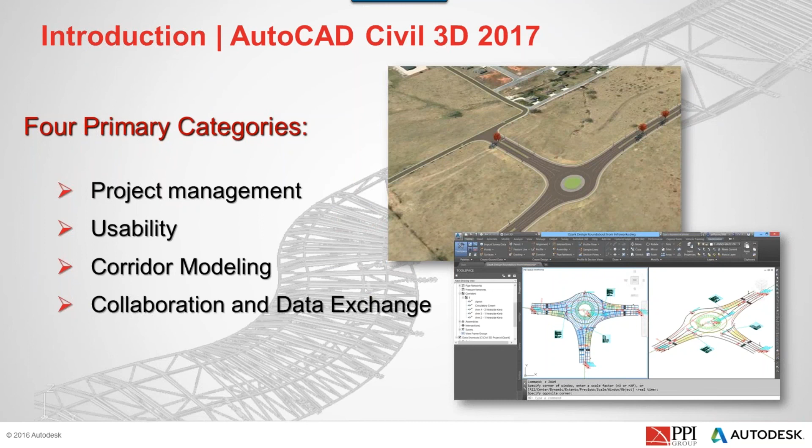Starting with project management, we'll be breaking down these 5 individual categories: reference styles utility, cache data reference surfaces, corridor data shortcuts, subfolders, and data referenced objects. That's a big one, very cool. And then also streamlined creation of data references.

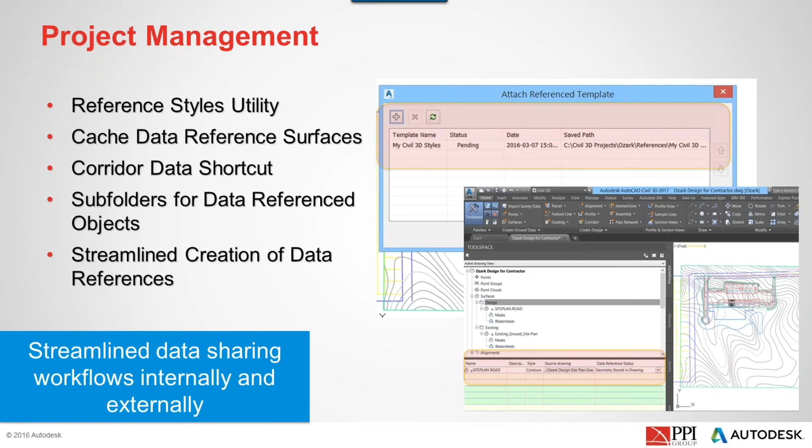All right, so let's break it down a bit. The first one here is the reference external styles. Peter Griffin thinks this is pretty cool, and I do too. What this basically boils down to is the ability to complete a drawing. What you're seeing in that top ribbon on the Manage tab, you'll notice over on the styles where that yellow arrow is, we have a new button called Reference.

As we all know, it's hard enough to get these project plans out. Often what we'll do is start a drawing using our in-house template, and then from there we need to convert it, whether going to an agency or another consultant or whatever it may be. So we end up having to go through this conversion process or importing data. What we're going to end up doing with this is a way where we can actually reference other templates while still staying in our current template, and we also have the ability to access other drawings with possible styles in it. So this is not only a great tool for the drafts folks, but also a great tool for CAD managers. There's a little bit of something for everybody in here, and we'll get to that in just a bit.

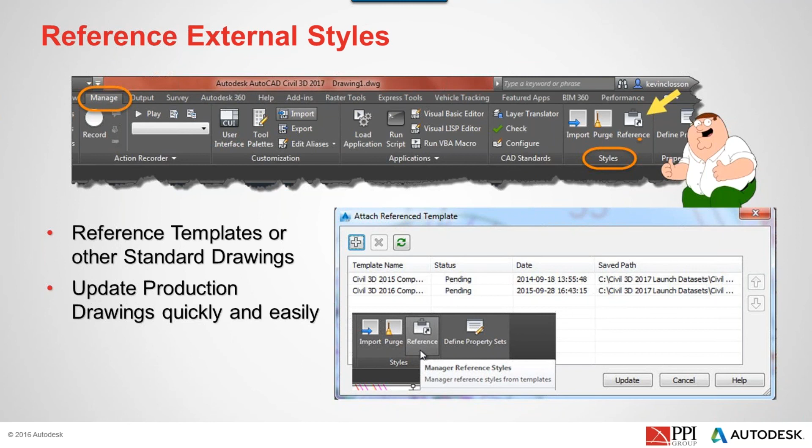Another new feature is the ability to cache surfaces, and what that's referencing is data shortcuts. As you know, a few versions back the data shortcuts were kept within your drawing when you go to send it to somebody, but the one piece that wasn't was the surfaces. So now you can actually cache it and send this out. The whole concept of this is to streamline collaboration with others, and it's a very simple process, just a couple quick settings. You send it out and you'll see that it'll come across.

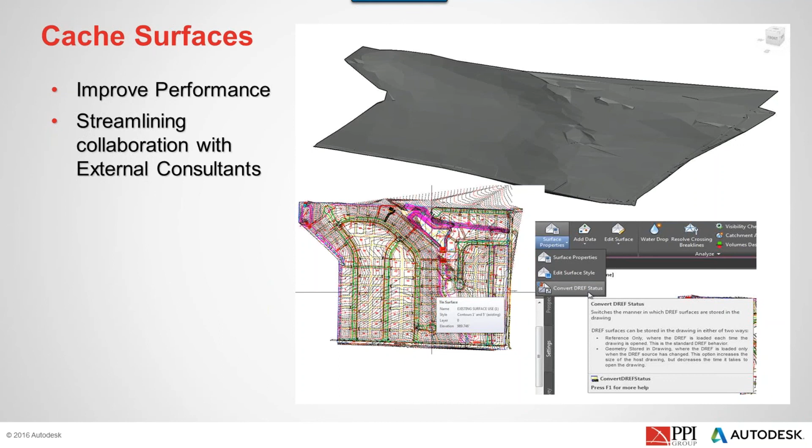Now this one was a big one: data shortcut folders. We now have the ability to create subfolders, and you'll see within these screenshots here, this is just in our data shortcuts. Notice it says surfaces. One of the problems has been, I don't know if it's really a problem, it's just been something we've had to work around or manage. When you would bring in data shortcuts, it would give you this great big long list of all of these surfaces, whether existing or phases or different designs, and we didn't have an ability really to organize those.

Well, now we can actually create folders, subfolders, directly in our prospector and again in the data shortcuts, and we can simply drag and drop those into their appropriate locations. So the end result is obviously better organization, but also we can kind of emulate corporate project structures.

Other little goodies here, same thing really on the other side. That's just talking about different alignments, whatever it may be. And of course, alignments can come in so many different forms.

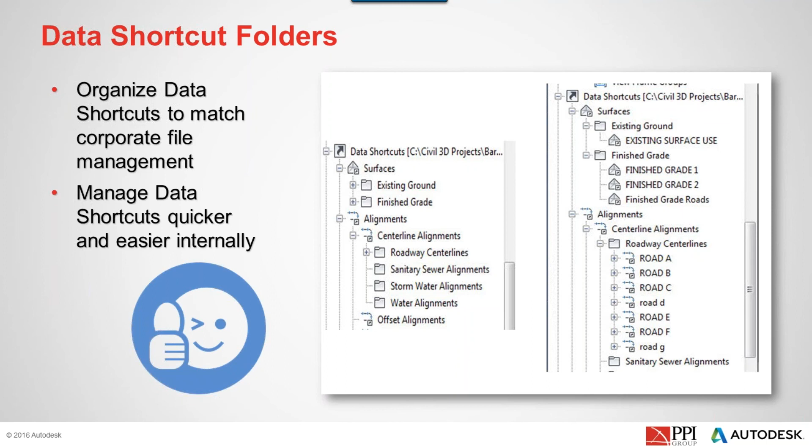So another way to simply organize these. I definitely give this one a thumbs up, you'll dig this. What else we got here? Like a movie review, yeah, oh yeah. This is big time.

And then what else we have here? Reference multiple data shortcuts. So the idea here is, if you can see that on the screen, we actually have the ability to pick several data shortcuts at any given time. You can right click or drag them directly into your drawing, and what it does is it'll do them all at one time. So I don't have to go in, grab each one, drag it across, check it, re-import things, whatever it may be. We can just use a simple shift button, highlight several, and drag it right in.

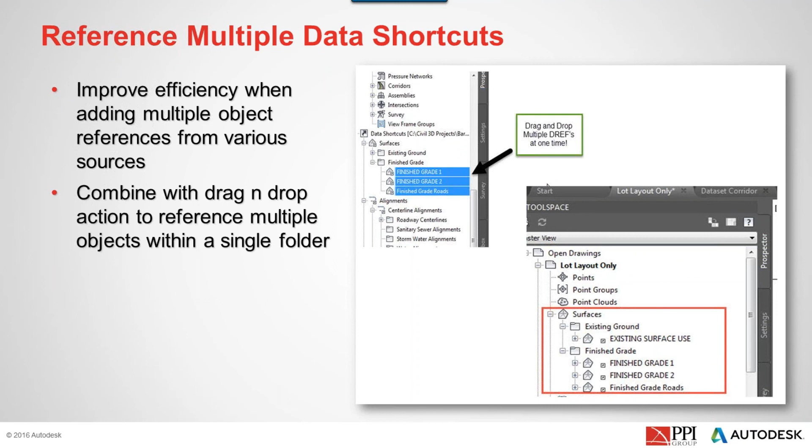Also, when it comes to alignments, profiles, all of that data comes in one shot as well. So you can kind of pick and choose. Well, maybe I should say that after the fact, you can always pick and choose. So very nice.

And then finally, dealing with these corridor shortcuts, this is big. This gives us the ability now to create corridors with feature lines.

Or sorry, I jumped ahead here, I tipped my cards to you. Actually, this allows us now to do the... I know, darn it. Well, I'm so excited to get to it, and it just dawned on me. I'm like, oh, dang it. Anyway, well, there you go. That'll keep some of you tuned in, maybe.

But anyway, corridor shortcuts. Traditionally, this was the one object that we couldn't kick out via data shortcuts. Now we can, it's just another option. You'll see, I'll point it out as we go. But again, it just gives us the ability to simply jump out and bring it right in, and you have complete control over it too once it's in your drawing.

Just like all data shortcuts, we can't change it, but as you can see on the slide, we can perform cut and fills and all kinds of stuff that we traditionally do with a corridor. But again, we just can't change it. So no more just pulling across surfaces and things like that, we can actually bring the meat of the drawing. Anyway, let's maybe take a look at these first before I get too far along, keep it as simple as possible.

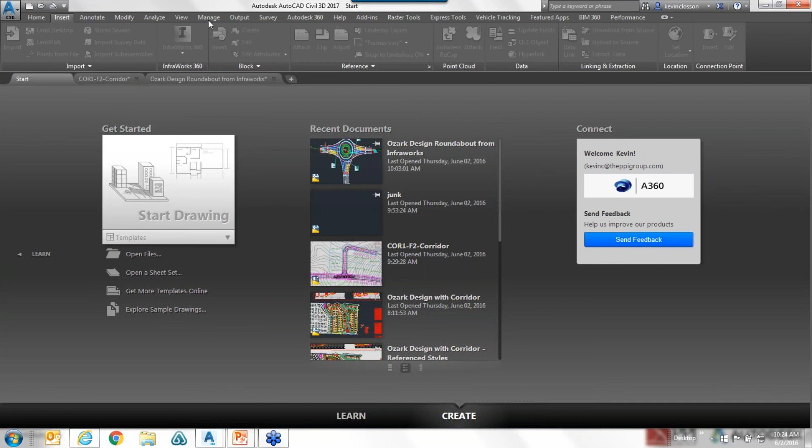Okay, so you'll notice this looks almost identical, and for the most part it is. However, let's start off with this reference external styles concept. And again, back in Chicago, this was the first thing that got the big oohs and ahs out of us nerds sitting there.

So if I were to go start a drawing, like we always do here, I'm going to browse out and grab one that I've already set up. And I renamed it, this is actually just Autodesk's template, but for simplicity, I named it Company Template. So if I grab that and say open, this is going to be, you know, many of you know this one, it's just got all the traditional Autodesk styles in it. Expand them out just so you can kind of see it here.

Check, and in particular, maybe I'll create an alignment. So here's alignment styles, and there you go, that's all the traditional ones. So what this tool does for us is I'll quickly create an alignment. And I'll leave it as the default name, alignment style proposed, sure. Label set, all labels, fair enough. I'll say OK.

And I'll draw something in here with curves maybe.

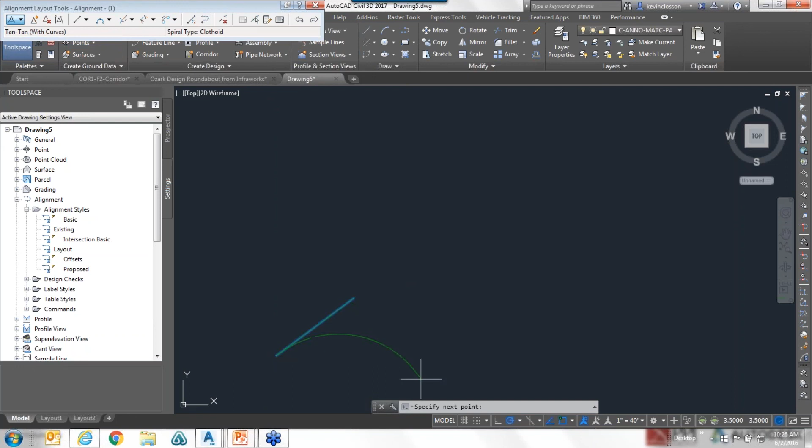Okay, if I zoom in, you can see that we have nothing too fancy, just a simple alignment, again using Autodesk styles. All right, so now this new tool allows me the ability to, on our Manage tab here...

There's a new button called Reference. If I select that, you'll see this form in the panorama pops up here. What I want to do is go grab this secondary template. Maybe this is something we're trying to deliver this in. You can do drawings or DWTs, and this one's called Project Template.

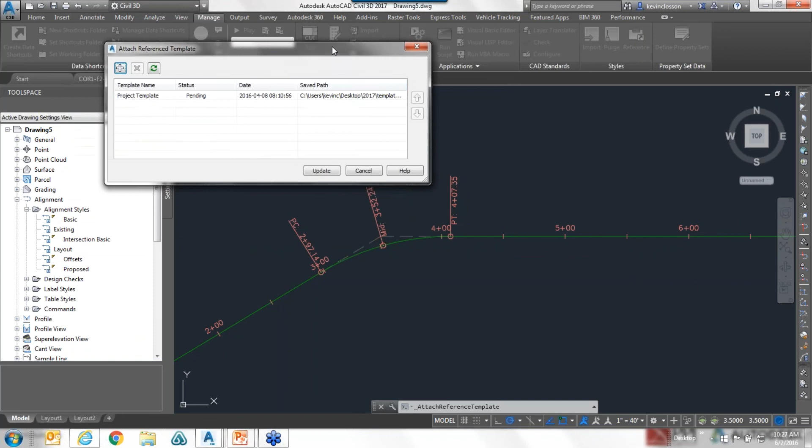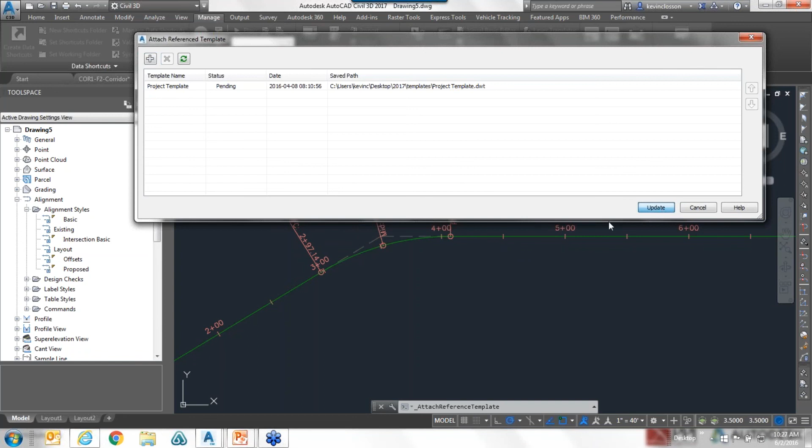Now before I go ahead and do it, when I grab that, you'll see down here that it lists that information. And currently, if I expand this out a bit, it's worth noting it says that it's pending. It's reading this, but it's not actually invoked yet. I created this and left the default name, but used the default style called proposed. If it was a different name as far as the alignment object style, you could switch it once this has been appended. But if not, I'll just go ahead and update this first. You'll notice, hopefully, how it changed.

The reason being is that other template, the pseudo deliverable template or whatever, has the same proposed alignment name. And these little icons, if I highlight that, they call that a paperclip, and that's just letting us know that you do have a different template or whatever's used there.

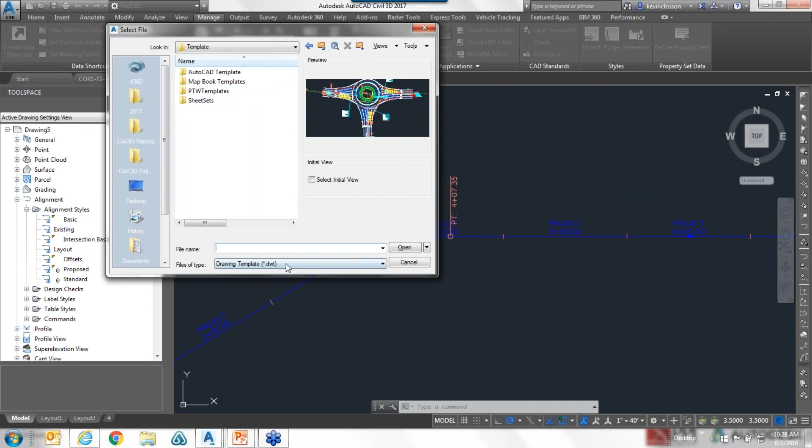Okay, now I could switch that back or get rid of that, or maybe I want to do something like this. If I were to go back in, I'm going to actually open up that original template, and I'll look in that same folder there. I'm going to grab the company template this time. You can see here it says company template DWT.

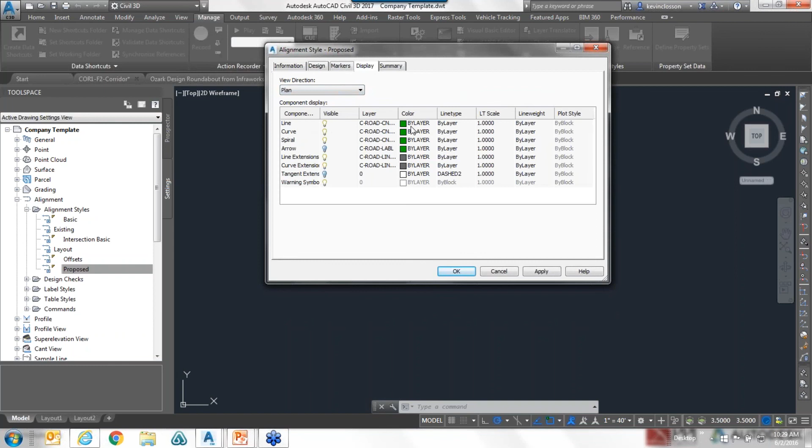If I go to that alignment and grab the proposed style that we've been playing with here, just for kicks, I'm going to change it—and I would never do it this way, but for speed—maybe I'll make them some form of yellow. Fair enough. And if I save that...

I'll jump back to my other drawing. And if I bring that template back in... my screen is flickering. Actually, I'm going to do it a little differently, I think. I'll just call it Company 2. Let's see what this ends up playing out here in just a second. There we are. Oh, where did I save it? Darn it.

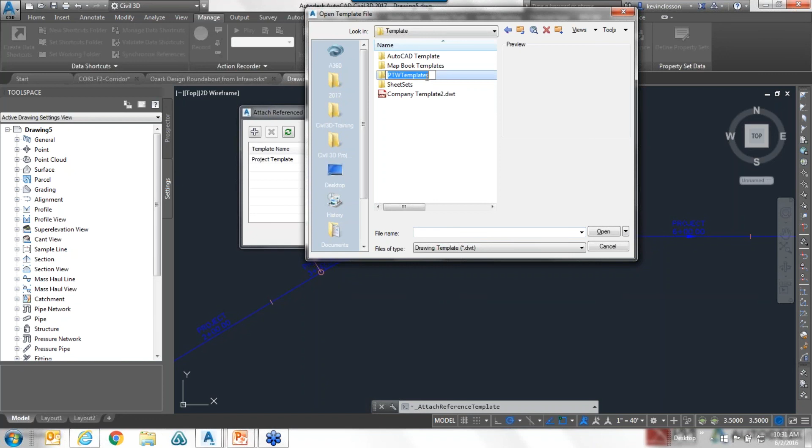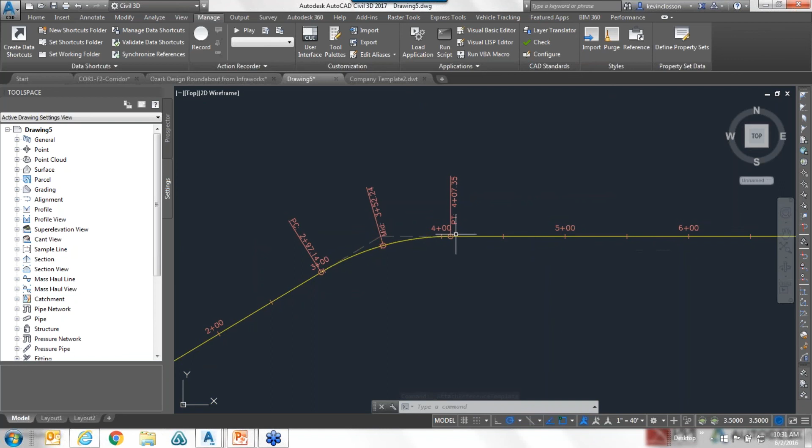All right, so here's the last little piece I wanted to show with this: again, I can load multiple templates, and I also have a hierarchy structure here. I'm going to update those first. Notice when I hit update, see how that went back to the original? Or at least to the one that I changed it to. If I go right back into that, I can grab whatever it may be, and just like other places of Civil 3D, we can jump around the hierarchy, update it, and it's going to go right back.

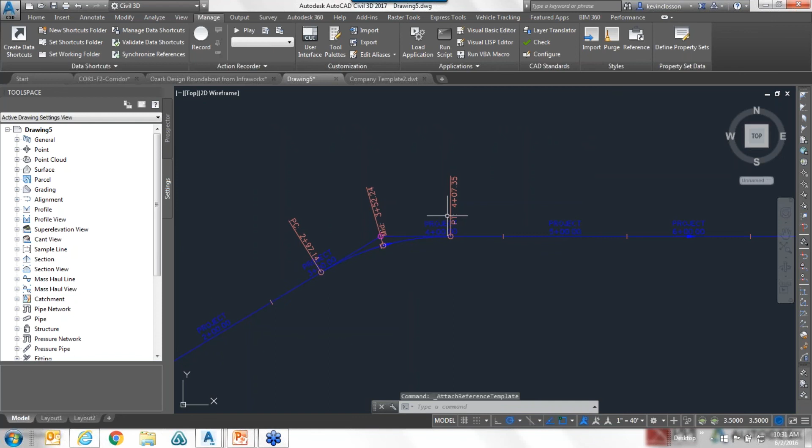Very cool. Okay, so that is referencing external styles. Again, we can leave it as it originally was as far as starting our drawing from our template, and then we can bring in other drawings and/or templates to finalize the design, just kind of cleaning up the whole process for us. Now, this one—very, very slick, not all that exciting, but very, very slick—is the caching surfaces.

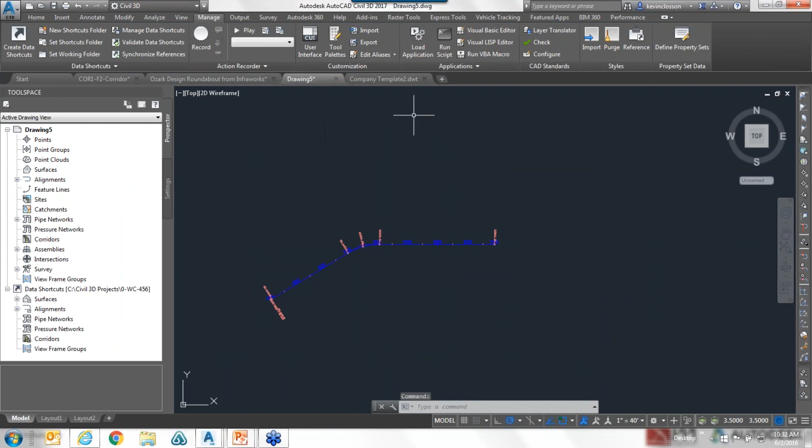All that ends up being: I started up a drawing here right before we were playing with this, and I have a surface. Maybe I'll leave this same drawing up and I'll save this on my desktop there. What I was going to do with this is maybe bring in a surface or whatever via data shortcuts. Any one of them will work.

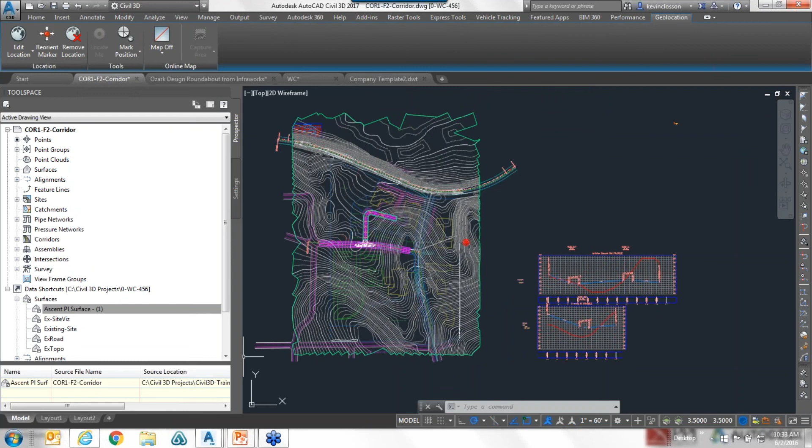Okay, all right, so now if I were to save this out—there's just a couple quick things to show with this. If I save this out, or I can do it from either drawing I guess, I didn't have to go through all that process. But again, if I save it and send it to somebody, the only thing that doesn't come across would be these surfaces. However, there is a new field, a new property field at the very bottom. Drag that across.

There it is. So by highlighting the header of surfaces, directly underneath you'll see there's my existing surface that I brought in. Here it is, data referenced status, and it says geometry stored in drawing. So if I save this out, that would end up being kicked out with it.

If I drop it down, you'll notice there's another setting in there. It just says geometry stored, or sorry, reference only. So that's one location for it, and there's a couple other spots.

To globally do this, if this is something you're always doing, sending these out, and you do want that surface to be cached and always sent with the drawing, you can go up into your settings tab under surfaces, and it's under commands, it's create, and of course they all look the same. Create surface reference, edit that, and...

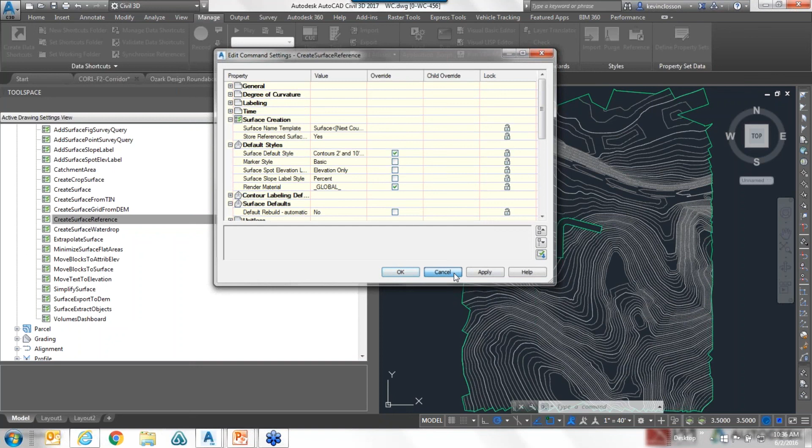Okay, moving on here, I've got a limited amount of time, but if I go back to this other drawing I'm playing with, when you have a large drawing or a large project and you see all these surfaces here, this is just up in the prospector, okay?

We now have the ability to simply right click on these, and I can create a folder. If we want to name this—say in this particular set there's several existing surfaces—I could call it EG for simplicity, and now you'll notice there's an EG folder.

I could create these, you know, possibly something like phase 1, phase 2, whatever. And then from there, these surfaces can simply be drag and drop for organizational purposes, and it still behaves just like they always have.

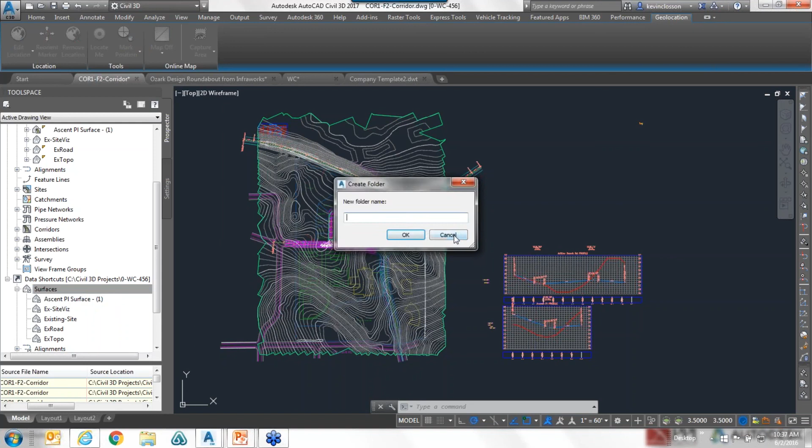Where this really is nice, though, is down in your data shortcuts. As I mentioned, data shortcuts have a tendency to expand quickly—from multiple sources you keep compiling data, and before you know it you have this huge list of surfaces, alignments, profiles, whatever it may be. So again, it's nice—you can simply right-click, create a folder, call it whatever you want, and organize it that way. That was a big deal to us.

And then from there, take it into whatever drawing it may be. From here, I can go to—and I mentioned this earlier, this is a big time saver—I can grab several entities at any given time, and either right-click and create the reference, or you can even drag and drop them right into your drawing. You can see where a couple different surfaces filled in, that kind of thing.

Also, with your alignments, profiles, whatever it may be, again we can grab several of these, right click and drag them right in. You can see where those filled in back there. So no more having to do it one at a time.

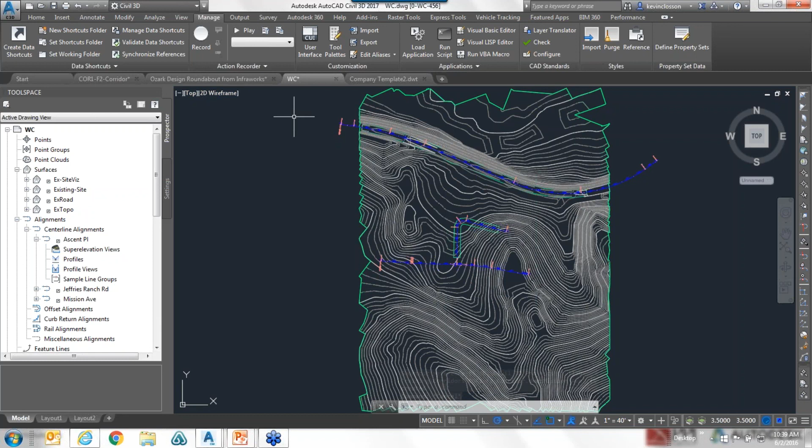So fair enough. And now maybe lastly on this—and again this was a big one for us—was the new ability to kick out a data shortcut of a corridor.

There's really not a heck of a lot to it, pretty straightforward stuff. You can do the old manage, create a data shortcut, and if I go all the way to the bottom, you'll notice one of our options now is corridors. If I wanted to, I could throw them all in the drawing at any given time, or all into that data structure or project. Now you'll notice the button expands out, perfect.

And if I were to jump over to a different drawing here, these corridors can be brought in the same way.

Right click, create reference. It'll take a second here and then it should compile. Very nice.

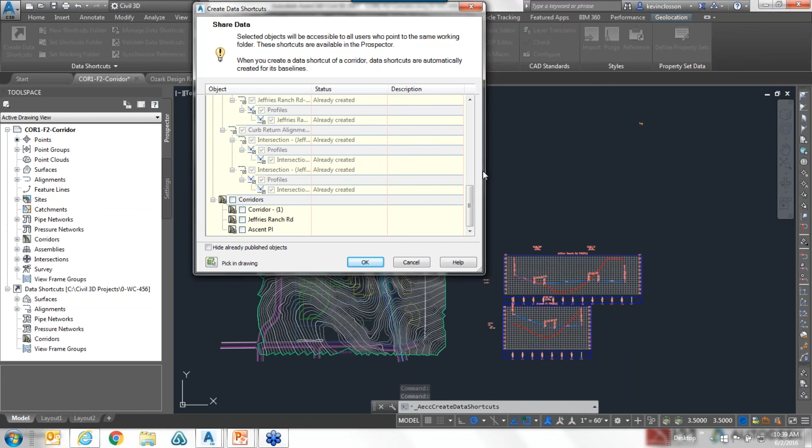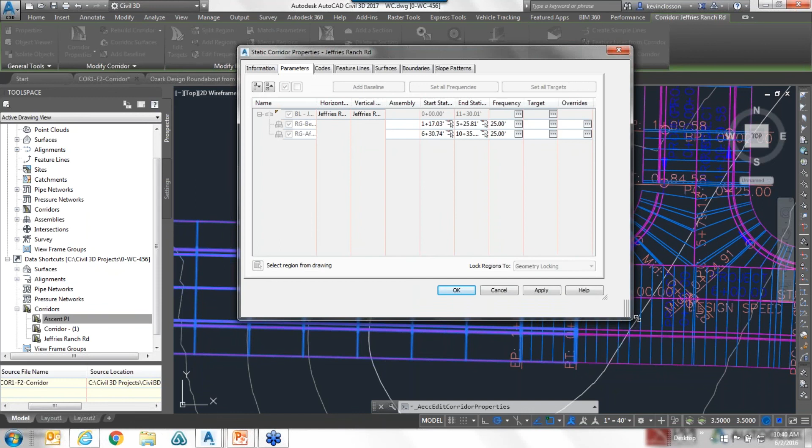Now maybe just to explore it real quick, if I pick any one of these corridors and go into corridor properties, there's not a lot we can do with it as far as actually changing the design. But we can do everything we've always done: create surfaces, create samples, get volumes, materials. You'll notice a lot of it's grayed out if you see my screen. We can build surfaces directly on the fly. Bottom line is we just can't change it, but everything else is still available—frequencies, targeting, all of that.

Okay, so I'm going to jump back over here to my PowerPoint for just a moment.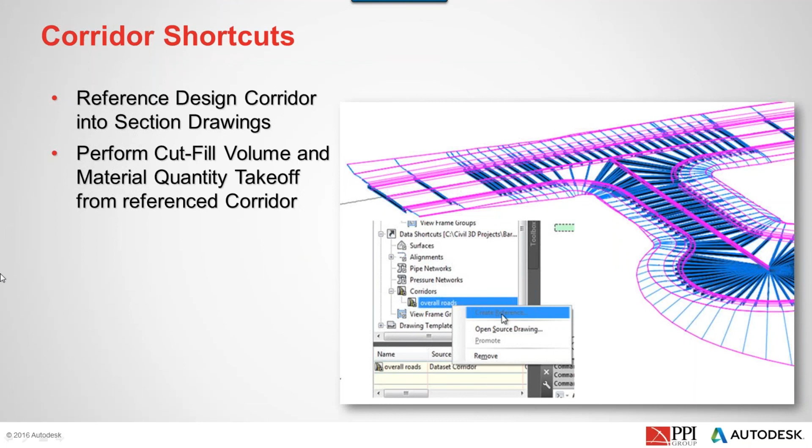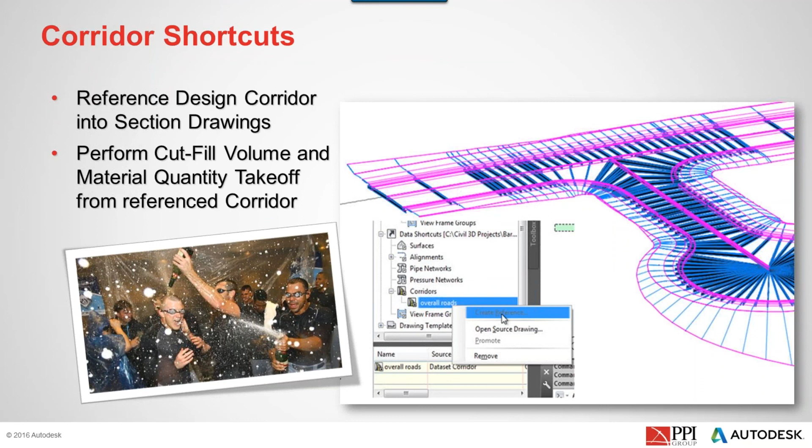So again, these corridor shortcuts, big deal. And in fact, that was us. That picture was us—I took the picture. That was in Chicago when we found out about this. I remember that, yeah, that was real champagne, real deal.

All right, moving along here, talking about usability. One's not that big of a deal, but it really became a nice feature. I believe it came out in Civil 3D 2016 in one of the extensions, or maybe the service pack. It's called the no site option for feature lines—though it could be a feature line or any type of object. For many of you that deal with feature lines, you know that if one entity crosses another and they're both on that same site, they'll interact with one another. Sometimes that's great, sometimes it's not so great. I'll show you in just a second.

And then maybe briefly, at least point you in the right direction, with the pressure pipe catalog—they finally added content for us, and that's a big deal. That's a huge deal. If I'm not mistaken, I think they have about six catalogs now. They've added everything from hydrants and additional valves, appurtenances, what have you. So that's a big deal.

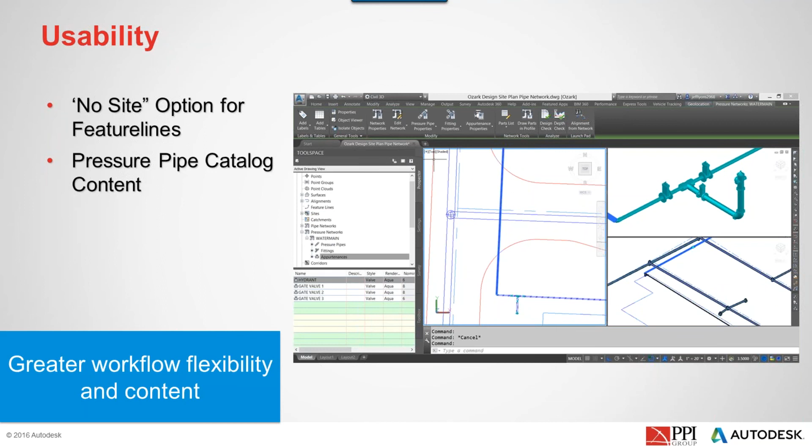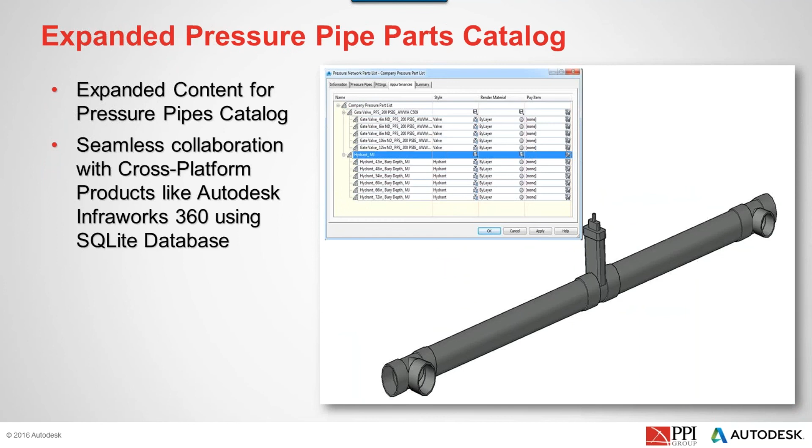So maybe just take a quick look back in our drawing—well actually, I'll save that and come back and do it all at once since we're kind of short on time here. You can see there, talking about the no site features and then the expanded pipe parts catalog. Very nice.

And jumping ahead here a little bit, talking corridor modeling. So with corridor modeling, here was the thing that I got all excited about: the feature line as a corridor baseline. I'll leave it at that for now.

But we also have corner cleanup—or actually I should say auto cleanup is what it should be. So if you have a tight bend, your design will automatically—the software knows now, and if you have a cross section or an assembly in there, it'll say, oh, this tight bend, or for that matter an angle, it'll resolve that for us. So instead of getting those bow ties, which we've had to fight for years, it now mathematically figures out a way to resolve that for us.

And then as far as extracting corridor features, we've always been able to do that, but now we have a workflow where we can grab all of them, or whatever it is that you want. Every now and then you need to get this out to a contractor or a surveyor that needs these elevated lines. Instead of going in and doing one at a time, I actually have a complete list that pops up and we can do them all.

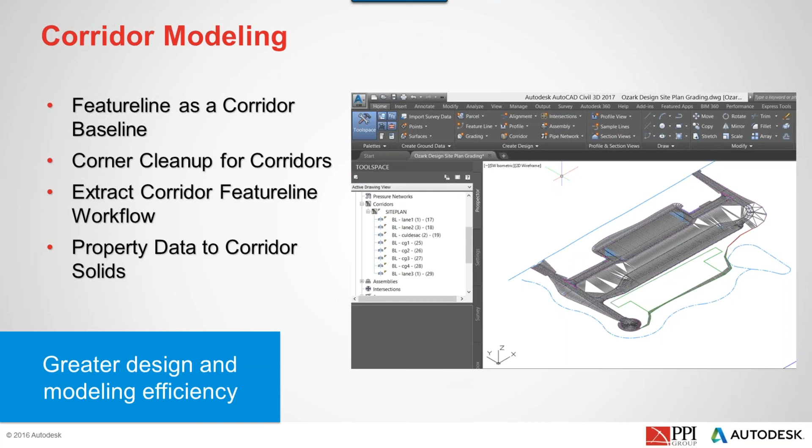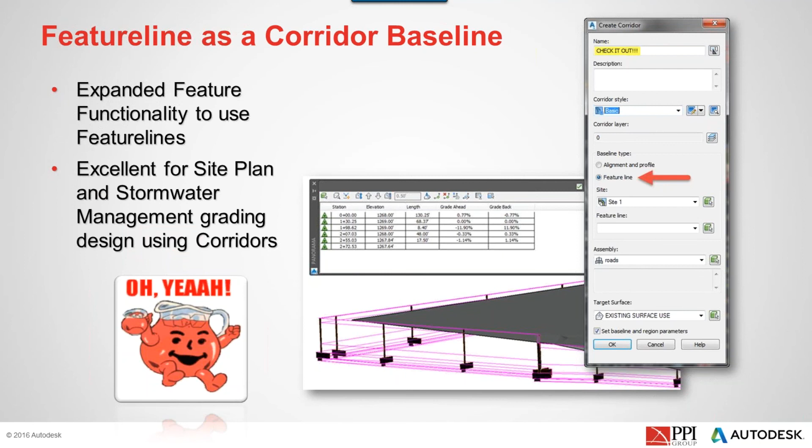And then there's just a quick dialog box. I'll show you, I'll bounce out and show it to you here in just a second. All right, so let's maybe take a quick look at that.

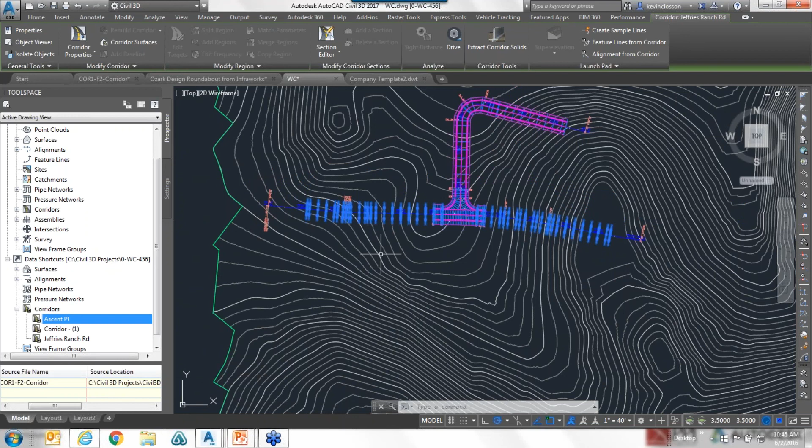So we will start with the usability aspect of this. With these feature lines, and you guys know this, it's nothing too exciting here, but I can draw in, say, a feature line in any old spot. I'll just say create a feature line from... I'll leave it on site 1. I'll leave the rest of the information here, and then I'll just drop it in.

Click, puts my old hash mark. I'll accept the surface's elevation, and then I'll move on to my next spot possibly. And again, I will accept the surface.

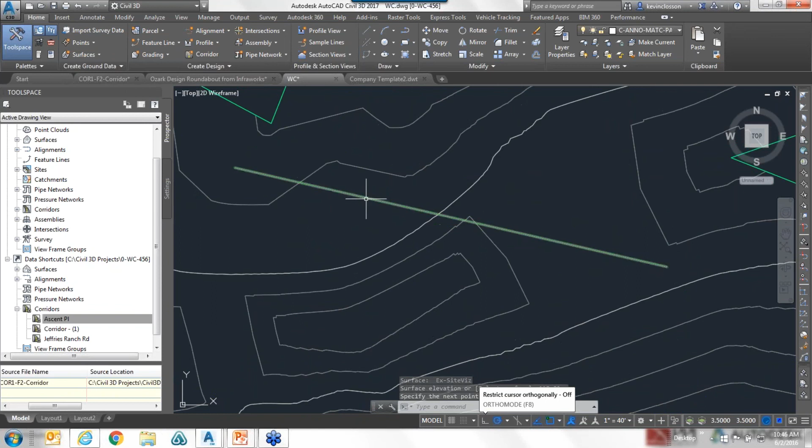All right, fair enough. So if I look at this thing, and we took a quick look at the editor on it, keeping it very, very simple, you can see we have a couple of different elevations. Now if I threw in, and I often will do this, where I'll throw in, say, a quick polygon or something like that. And if I return this into a feature line...

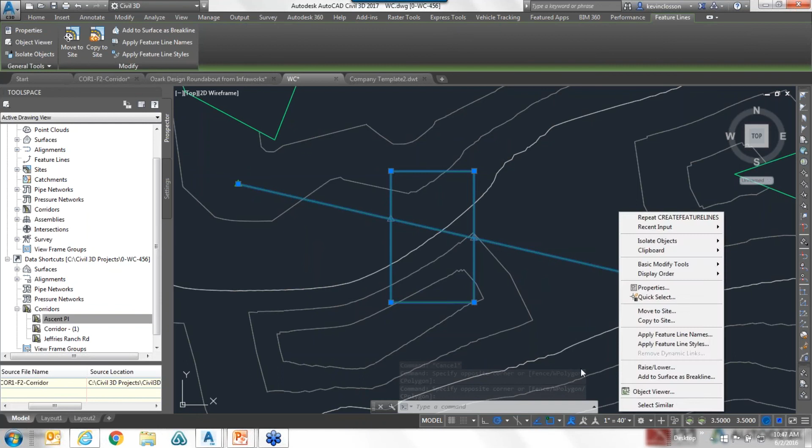I'll leave it on that same site. As I go down here, I'll assign some elevations to it. Maybe I'll make it 50 feet all the way around. Okay, if I grab both of these, and it looks pretty good to me at this stage of the game. If I grab both of these and took it into the object viewer, looks all right. But as soon as I drop that back, you'll see what that's doing.

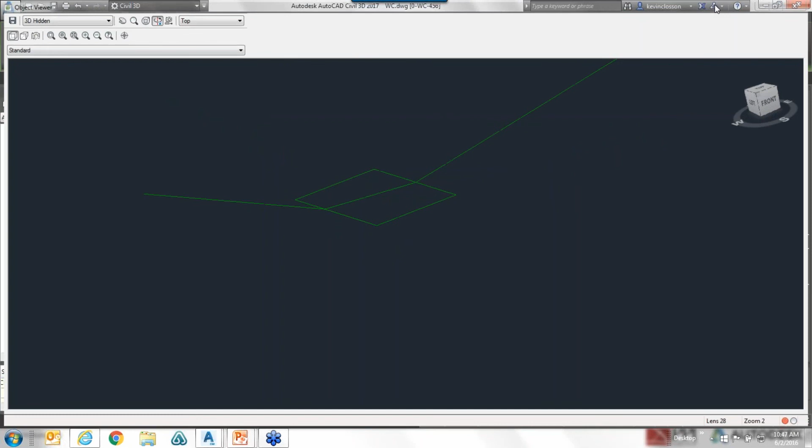All right. So now, if that's what I wanted, that'd be great. But if I didn't want these two to interact, I'd have to copy one to a different surface, or not to a surface, but to a different site or whatever. Well, now during that creation process, instead of doing it like that, I can actually create these.

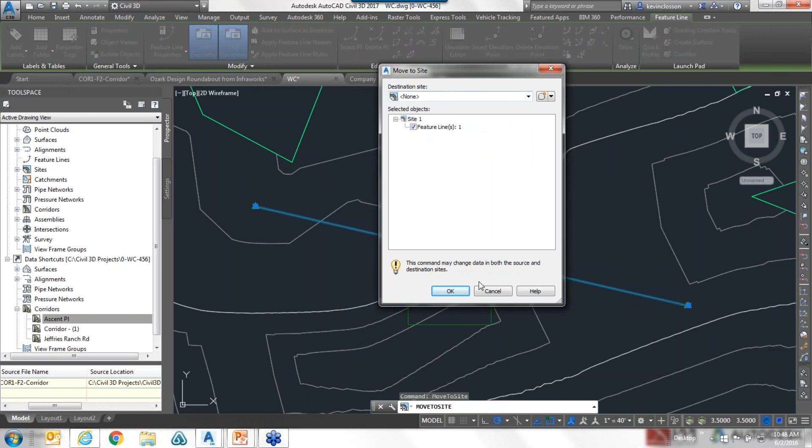In fact, I'll just grab this one here. I'll grab that one there, and I'll move it to the none site. So you'll notice that this is built in now. And we've had this for a little while in 16. Like I said, it came in late, but now it's built in. And if I again apply that, take both of those real quick into a viewer just to prove our theory there, and lo and behold, cool. So very nice.

All right. So again, with this whole concept of feature lines, we now can, like I said, build corridors directly from this thing.

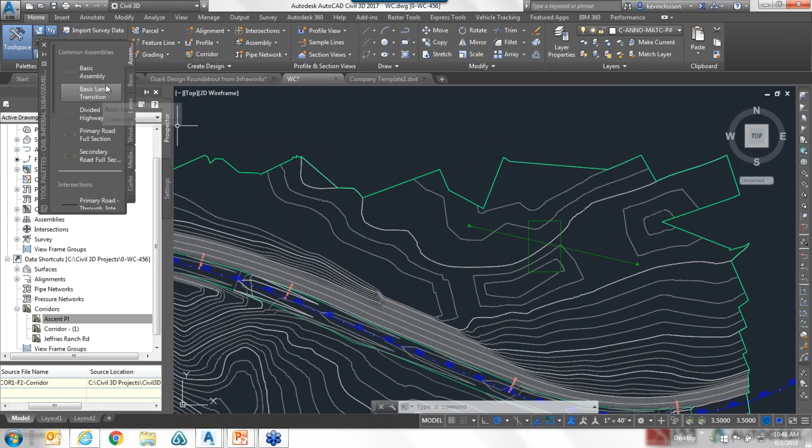So if I were to just dump in, say - remember this has an elevation and a horizontal position - if I just brought in a quick assembly, I'll just say basic assembly and dump it in somewhere. And let's apply that and see how it plays out.

So I'll create a quick corridor. I'll leave it default name, which I never do, but for speed I will. And as I walk down this thing, this time I'm going to say feature line. If I had it named, or I could just go out and grab it - oops, sorry, grabbed the wrong one. Site, I'll leave it on. I can leave that as none. Here's the feature line, I'll pick that. I'll go out and grab it.

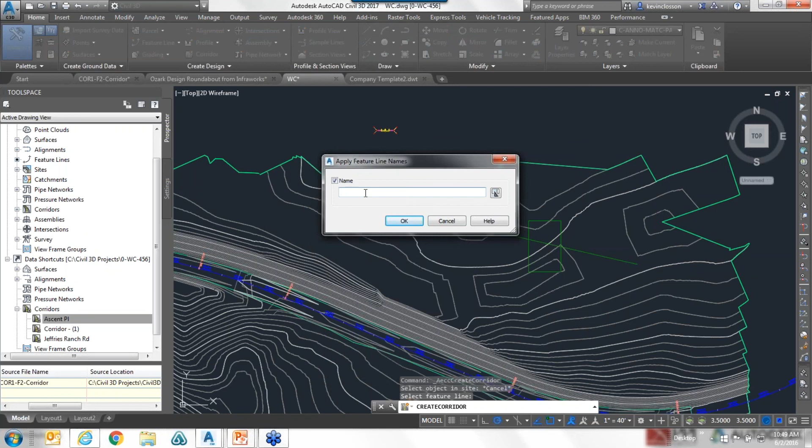And just like we used to do, we can just, like as if it was an assembly, I'll just say road 1. And that's going to take it back. There's that, renamed it, the assembly type. I'll just grab the one that I threw in there real quick. And if I can even target the surface if I wanted to. And then let's see what we get. Ta-da!

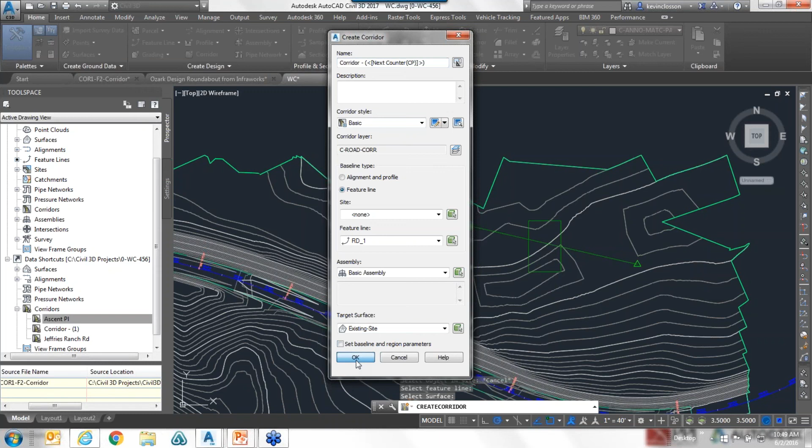Now, very, very beneficial if, in fact, say it's a site plan. In fact, that's really where this tool is going to shine. I no longer have to create the alignment, organize all of my alignments, sample, create profiles - and sometimes you have to, I mean it might be a little easier with more control - but this is just a fantastic way to quickly get this all in place.

Okay, and let's see, what else do I got here? I'm getting close to the end here, and I want to leave time for questions. Jumping out here just for a second.

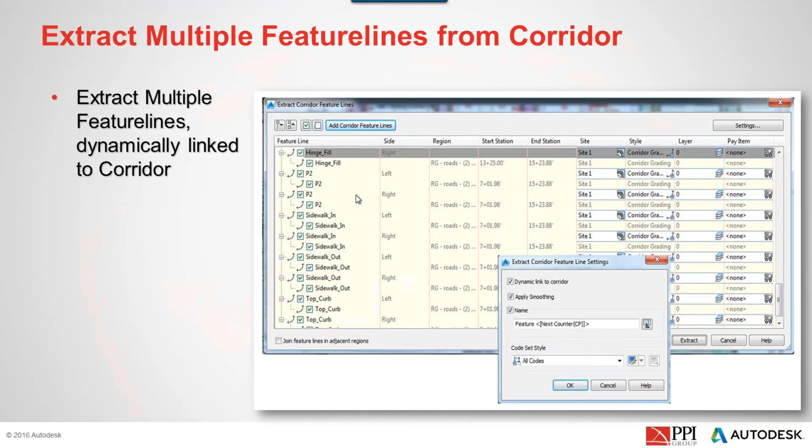Corner cleanup, we talked about that a little bit. You can see there, I'll just show it up here. There's not a lot to see with this. But when you have a tight angle, the software recognizes that, and instead of getting the bow tie, it's going to do its best to resolve it.

I'm not telling anybody anything you don't know, check it, right? I've played with it a bit and run into a couple of little hiccups here and there, nothing too major. But I found that if you start and stop at, say, an exact angle point, you may run into a couple of problems there. So what I've done is started just beyond or past a feature line if I have a tight angle like this.

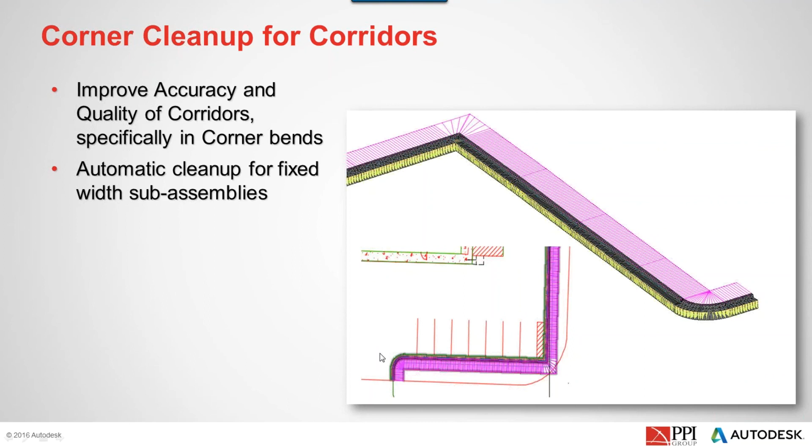Just something I was going to cover, might be another webcast, talking about exporting. We now have the ability to also export corridor solids, which we've had, but we can actually apply property sets. This kind of expands later, and it's really the same tool, but what makes it slick is you can put in mathematical calculations. Later, as it gets into Navisworks, for those of you that use it, once you bring that solid in, you can hover over it and it'll actually tell you what volume's inside of it. Often this is going to somebody that may not be on the engineering or survey side.

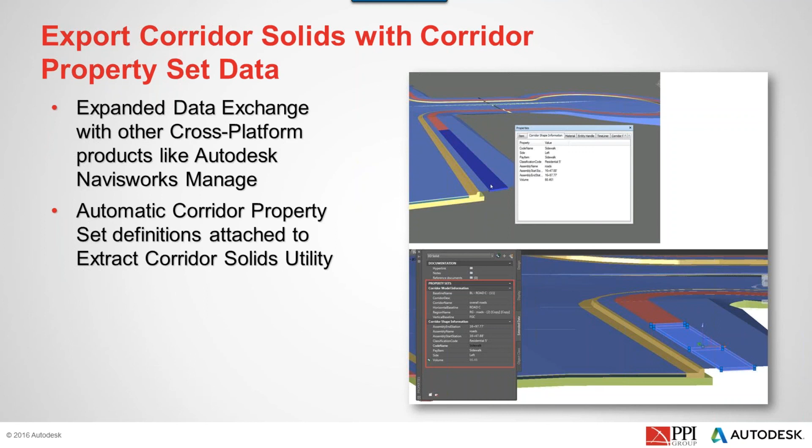So as they bring in your design, they can get real time, well, not quite real time, but they can get those volumes as they highlight them. And that actually leads right into the collaboration and data exchange here. You can see on this slide, the top one there, that's exactly what we're looking at. That's a corridor that's been applied, and you can see some different colors there. There's not a lot to it, you just export out a solid, and then you have the ability to immediately add whatever kind of property that you want.

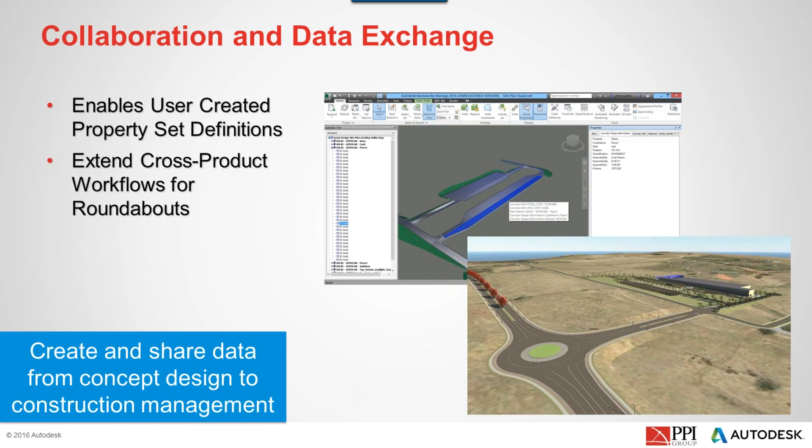And then finally, that cross workflow with a roundabout. This is actually for Autodesk InfraWorks 360. They've streamlined the process a bit, and I'll try to quickly go through this as best I can.

Okay, so maybe talking about this before I actually show it. Autodesk InfraWorks 360, if you haven't dabbled in it, it's a great tool. It gives us the ability to do preliminary designs, preliminary grading, everything else. What they have on the screen there, I just took a couple screenshots. It started out as a raw piece of land, and they just connected using InfraWorks and put the road in, and it actually does do a preliminary design that uses appropriate AASHTO tables and everything else.

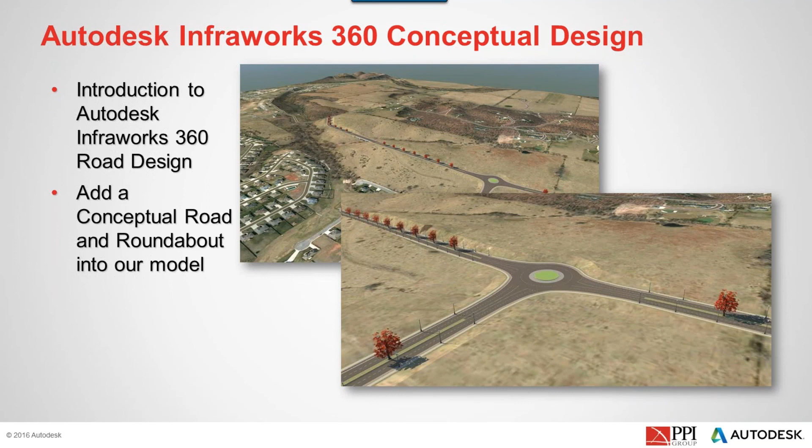Once they are connected and they just snap and connect, you can automatically put in a roundabout just by picking the intersection. From there, you can use what they call a bounding box and say, okay, in this area, let's kick out an IMX file. You can bring that directly into Civil 3D. At this stage, surfaces, all of that will come in, and then, if in fact we were looking at that roundabout, it's taken into that next slide.

Once that is imported in, you can see that you have complete control over it. For those of you that use vehicle tracking, this is the tool that it's using. Once that roundabout comes from InfraWorks, we then have the ability to click on it and actually do the full processing of that, or fine-tuning of it. In fact, for speed here, I'm up against the end.

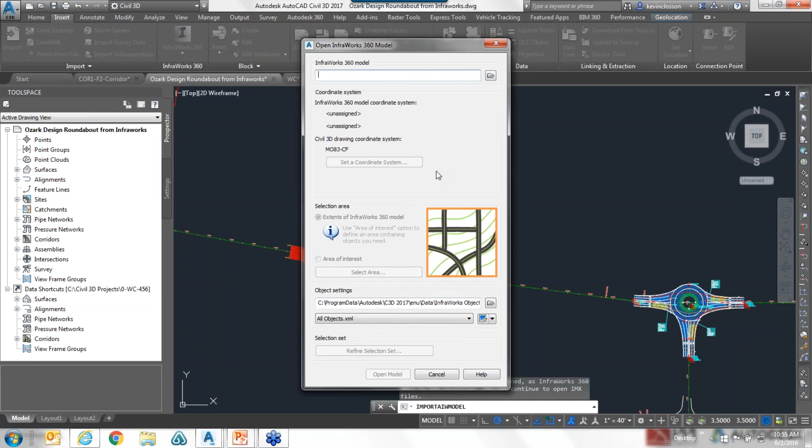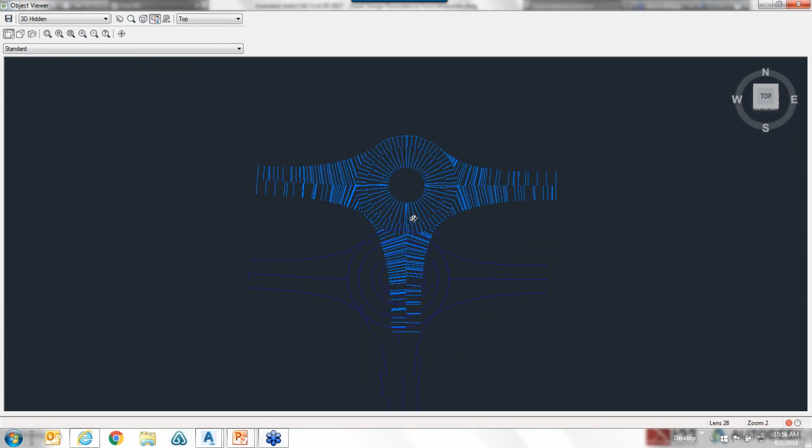All right, so you can see I already imported it, but just again to hit some of those high notes. If I were to bring this into a blank drawing, it's nothing more than insert, and you go up to InfraWorks, and this is where you would bring in that IMX file that was created back in InfraWorks. That data would come in, and it would give us this, which, like I said, is modeled using the vehicle tracking tools. So that's everything that was used.

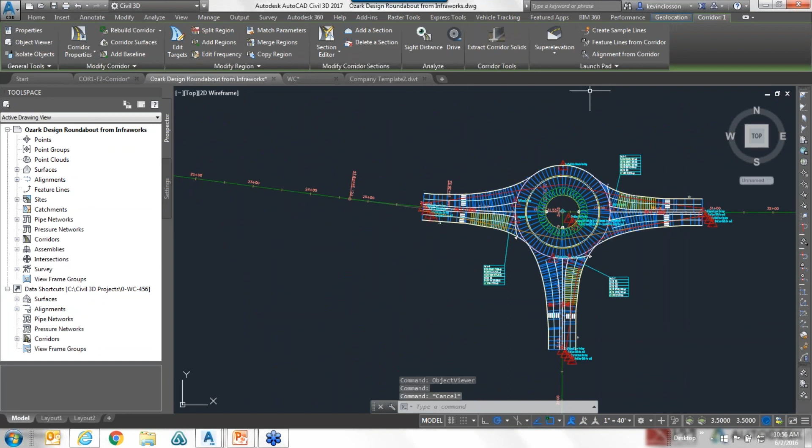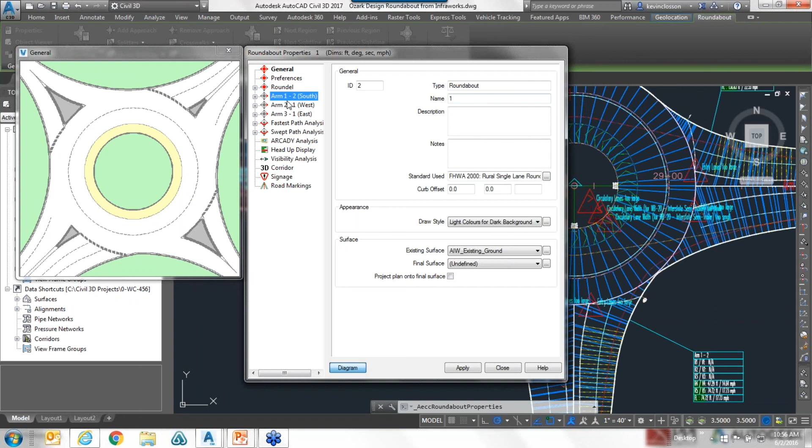Now, this can be edited just by simply grabbing it when it highlights here. There it is, and I can go right into the properties of it. For those of you that have dabbled with vehicle tracking, which is really picking up in popularity for several reasons - it's not just used now on the civil side. A lot of architects are picking it up, using it for tests as far as where buildings go, can trucks make it in, what have you. As you look around here, you have complete control. Gives you a nice interface, with the different arms coming off that and everything you can add to it.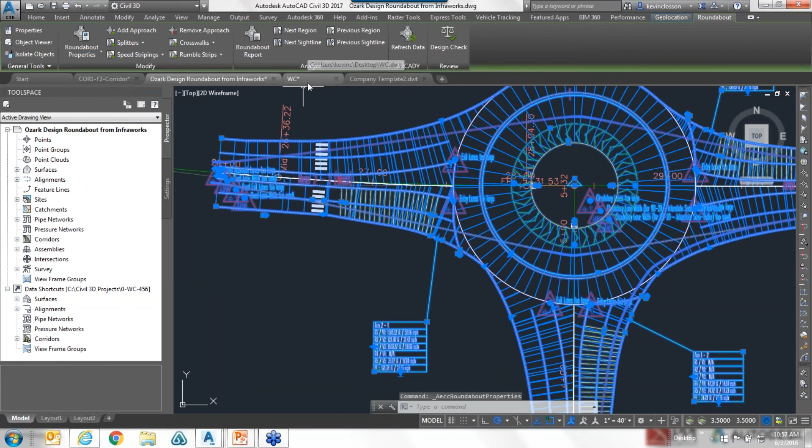Okay, and then maybe just as a quick cleanup here for a couple other quick things, I just wanted to show a couple things with the corridors real quick, if nothing else. If I pick that corridor, I was talking about extracting solids, which we've always been able to do. It takes a second here, and I'll just say all.

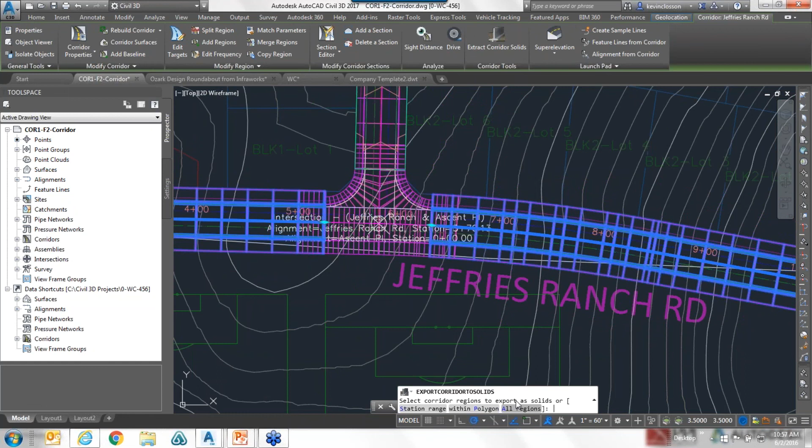And if nothing else, I wanted to point out at the end here where it says layer name template. If I can get in there - here's where we can go in, we can start actually assigning - well, actually, this is how we layer it. And here's where we can go in and start assigning that property data. You can even put equations in there, whatever it may be. And then you're sending that out wherever it goes, and whoever brings it in is going to have those capabilities.

And then finally, and I'll open it up for questions, any one of these corridors can be selected, and we can do feature lines from corridors. I'll just say all. And if you remember, prior to this, we would have to go in and pick each one at a time, and then import those into your drawing. Now I'm not going to do it here, but that's everything in this one corridor. You can see you can pick and choose, turn them all off, and then go through and pick and choose which ones you want to come in. At the end of it, the whole thing comes in. So very, very nice - huge time savers.

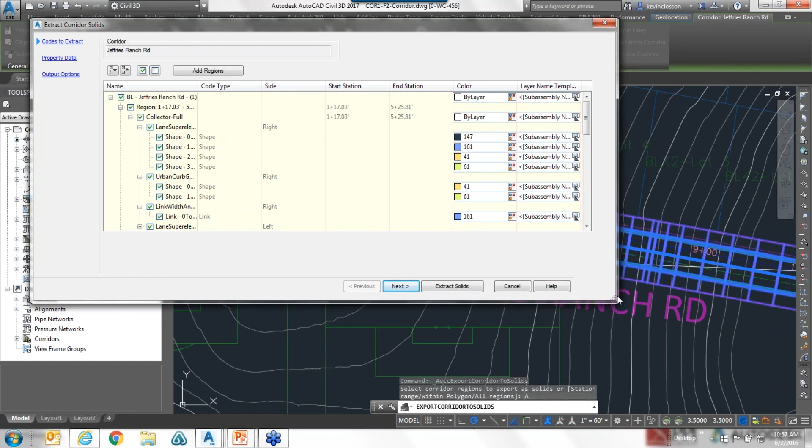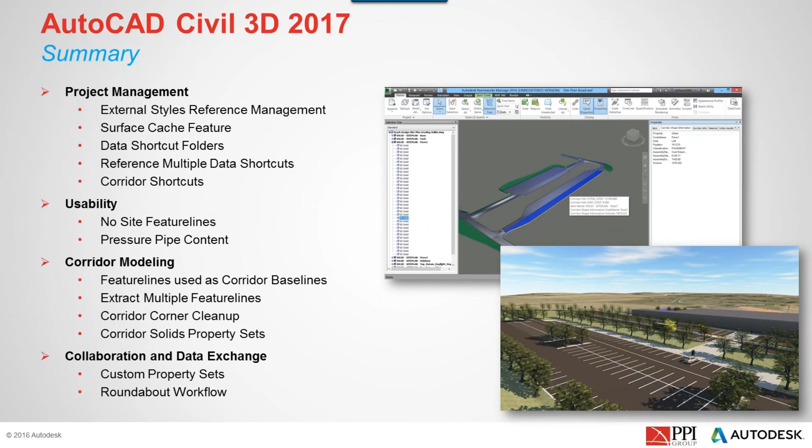All right, so lastly here, so what we talked about: project management, usability, the corridors - all the new corridor functionality - and then collaboration between tools. In every release, we're seeing our world getting closer or deeper into the BIM concept. I'm going to pop up a couple last slides. If there's any questions, I'll start going through them, and I could even take some of these offline as well. But if you need to get a hold of us, if you want to see more in depth as opposed to an overview of everything, give us a shout.

Lastly, I know, Jesse, did you want to?